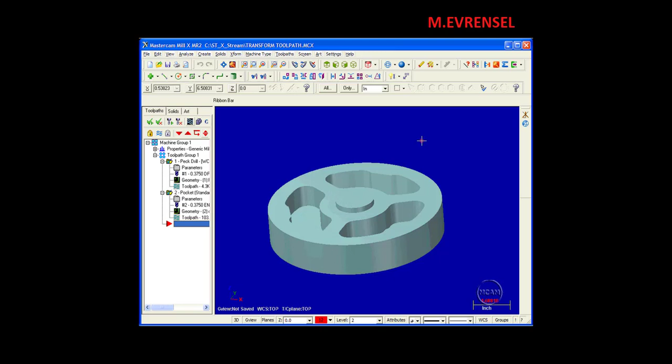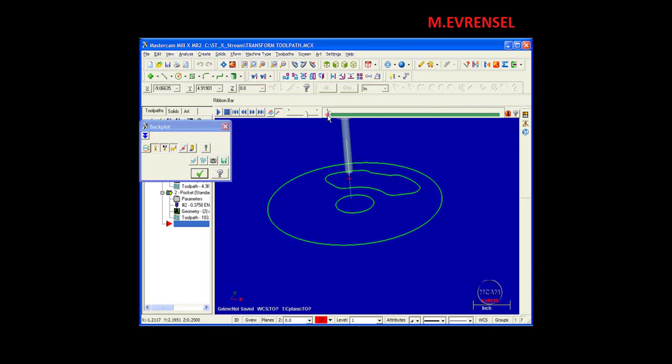I'll access my Levels Manager, Alt-Z, make my active level Level 1, turn off solids, and I'm going to make Level 3 visible. Click OK. This is the geometry that I'm working with. I'll backplot the toolpaths that I have currently in my Operations Manager. I'll drill it, and then come down and do the pocketing routine.

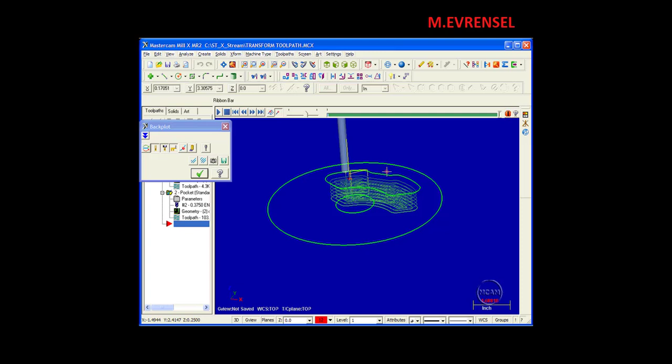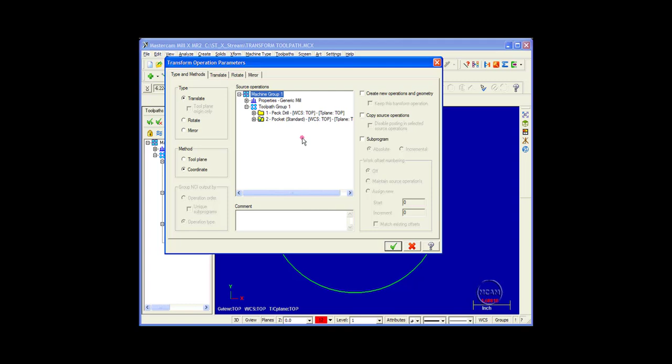So the existing toolpaths will only machine this one pocket. I need two more of them. They're equally spaced, 120 degrees apart. I'm going to go to my top view. I'm going to right-click in my Operations Manager, go to Mill Toolpaths, over and down to Transform. I'll select it. Now Transform Operations is to toolpaths what Xform Translate or Xform Rotate is to geometry.

I can select what toolpaths I want to be affected by this. I'm going to select both of these. Do I want to translate it, which is in XY coordinates? Do I want to rotate it, which is duplicating my toolpaths around a center point? Or do I want to mirror it? Well, with this particular operation, I want to rotate it. And before we get into any other parameters, I'm just going to keep this really basic. I'm going to come up over to my tabs and click on Rotate and set my parameters.

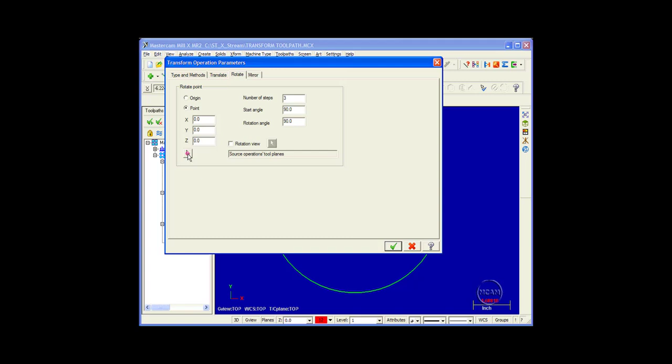The first thing I need to do is specify the point which I'd like to rotate my toolpath around. In this case, it will be my origin. I can pick a point. I can just click on this, go to my graphics screen by selecting my select arrow, and pick the center point of this arc. And it still maintains 0, 0, 0. I could put coordinates in if I choose to. Now for the number of steps, I do want a total of 3, but there's one that's already existing, so I need 2 more.

My start angle, this is the angle for the first duplicate relative to the original operation. Well, my original operation is at 12 noon, so 90 degrees. I want the next one to be rotated 120 degrees from that. Next, the rotation angle, which is the angle between the subsequent operations, will be also 120 degrees. I'll click OK. And now the system has reproduced 2 additional toolpaths at 120 degree intervals.

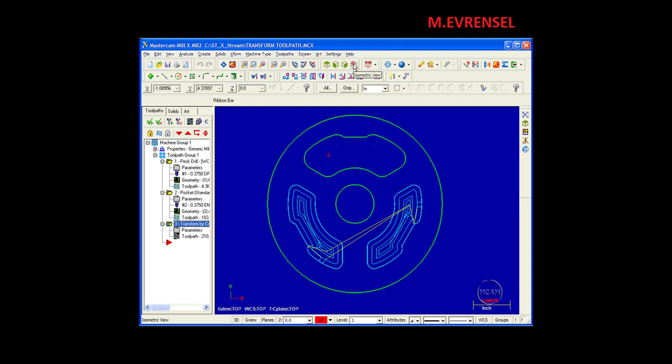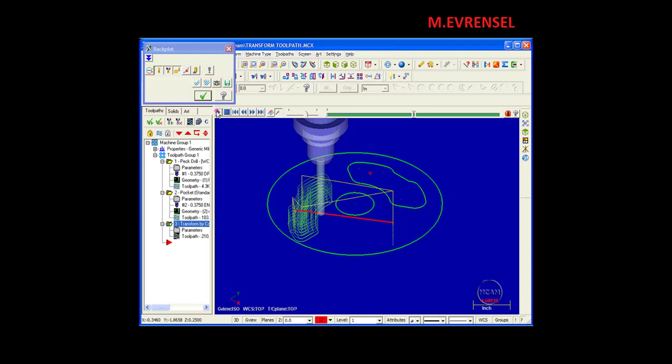Go to Isometric View, Backplot. Now I'm only backplotting the Transform Toolpath. I'll go ahead and play it. So the toolpath for these 2 pockets are contained within this transform operation. In order to get all 3 of them, I need to post all of my toolpaths.

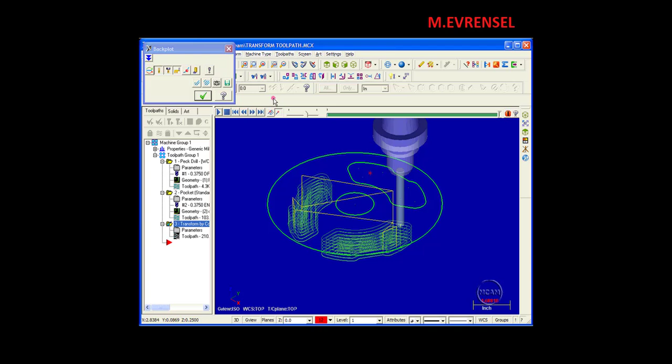Now I'm going to exit Backplot. I'm going to go back into my pocketing operation, into the parameters, pocketing parameters, and I'm going to turn off depth cuts. Click OK. Now notice, since this transform toolpath is relying on these toolpaths as their source, when I make a change here, it affects the transform operation as well, and I need to regenerate it. I'll regenerate all dirty operations. Now I removed the depth cuts just for the sake of saving time. I would not normally machine these pockets in one pass.

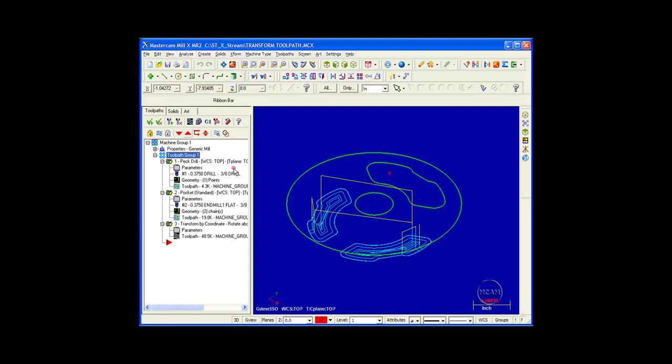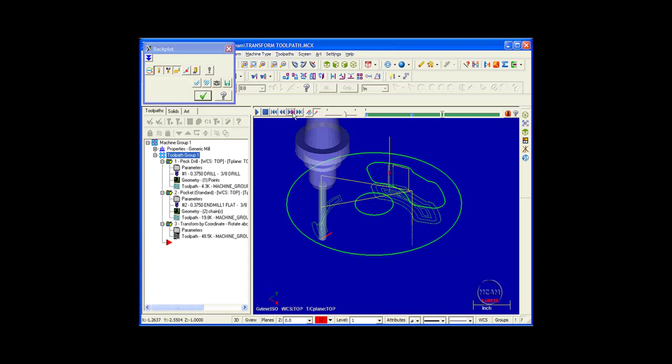But what I want to show you is I need to select all of these, backplot, and then play. And I'm going to step through. Notice my tool comes down and it drills, back up, and then it starts to do the pocketing. Drills and drills, then pockets and pockets.

So what ends up happening, my tool changer picks up the drill, comes through here, drills my entrance hole, puts it back, picks up my end mill and pockets, goes back, picks up my drill, drills this pocket, then picks the end mill up again and machines out the material in my two pockets. That's not very efficient to me. So how can I fix this? I'm going to exit backplot.

I'm going to go into my parameters for Transform. I have it grouping my toolpath output by operation type. Okay, so what that means is that it'll put all the drill paths together, it'll put all the pocketing paths together. That's why the tool change occurred between the drilling operation and the pocketing operation here, but didn't in the Transform operation. It was more efficient in the Transform operation. So somehow I need to contain these two operations within this.

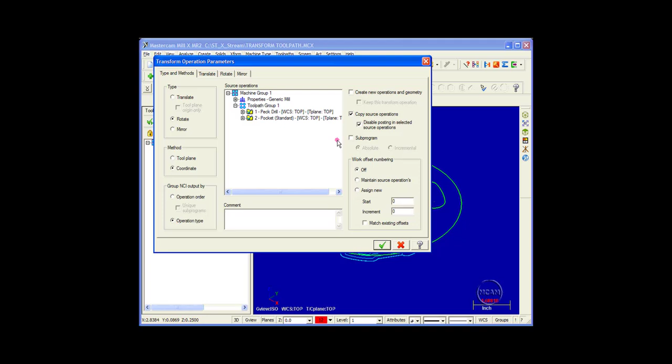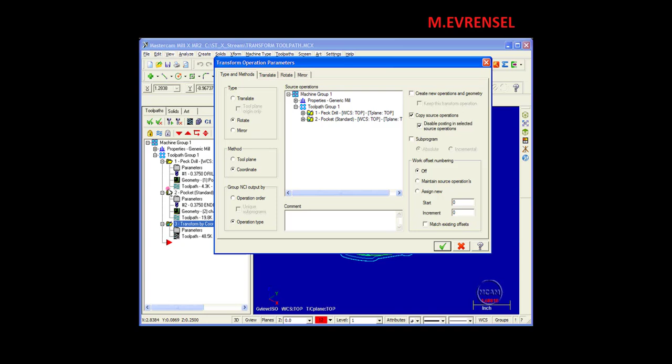I could do that by saying copy source operations and leave this checked: disable posting in selected source operations. What this will do is it'll take these two operations, copy them into my Transform operation, arrange them the way I have selected here, and disable the posting. Basically turn the posting off on these two operations, so when I go to post my code, I'm only posting this Transform operation. These two remain as the source, but they are not directly used for the code for my machine. I'll click OK. It grays out my toolpath for the peck drill and the pocketing.

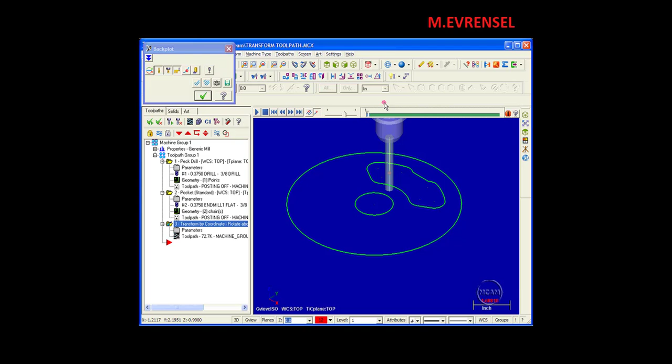I need to regenerate my Transform operation, which I'll do right now, and let's access backplot. I'll go ahead and step through this now. My drill comes down and drills the entrance hole for the first pocket, entrance hole for the second, and for the third. Now I'll have a tool change. It'll get my end mill and start to do the pocketing routine for the first, remove the material in the second pocket, and remove material in the third pocket.

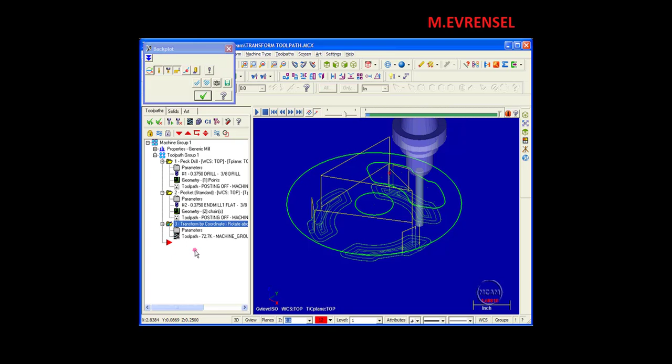The quantity and the spacing of the duplicated toolpaths is strictly parameter driven. So I'm able to go back into my parameters category and modify that at will. And using the method that we used in this example, any changes that I make in the source toolpaths will also be reflected in the Transform toolpaths once they're regenerated. So this gives us a basic overview in utilizing the Transform toolpath options.